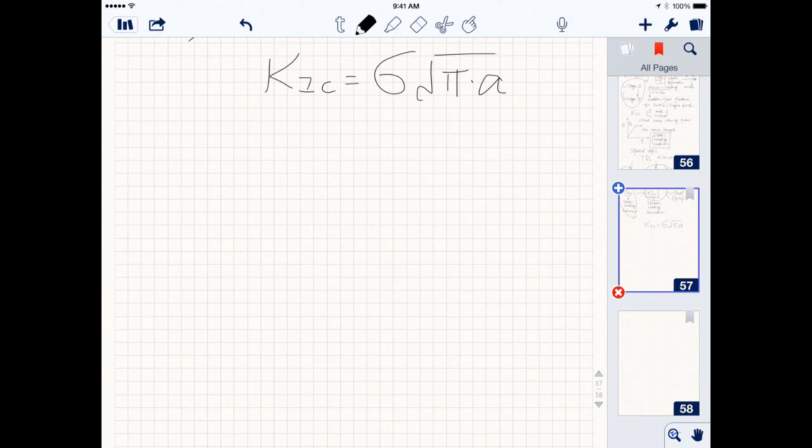Okay, so now a quick brief review of dynamic failure. What we ended up with last Thursday is we know tensile strength is the quantity we care about most when you have static loading, right? We say when the stress is limited to a certain value, and if the stress applied to the material is higher than the tensile strength, then failure is going to happen. That's what this thing here means, right? Now, for dynamic failure, we have another quantity we introduced called K1C, it's called the stress intensity factor. And here is the equation to quantify how you calculate K1C, alright?

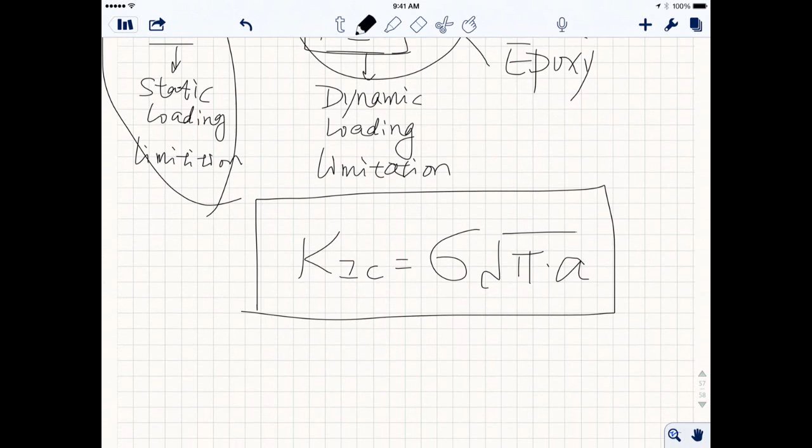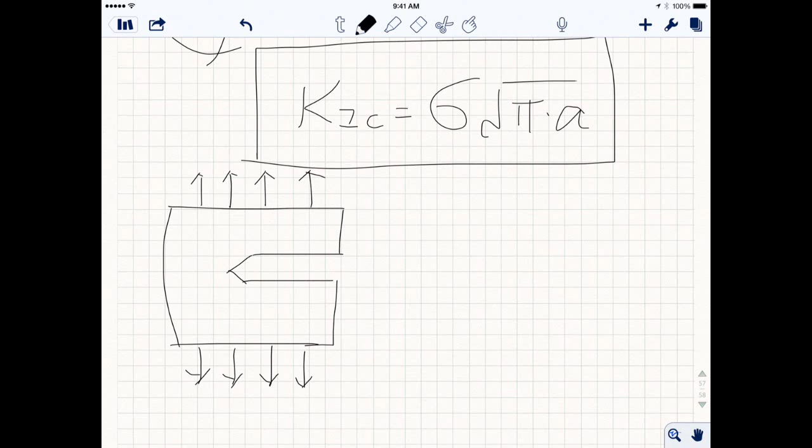Now, what K1C does is imagine if you have a material, something like that, then you have an artificially created crack on the surface or somewhere internal to the material. You are going to apply stress in a global fashion, apply stress here, here, here, here. Now if the length of this crack is 2a, length of crack equals to 2 times a, then your stress intensity factor, this K1C, basically tells you what the stress is going to be at the crack tip, right? Because we all know when you apply stress to a material that has a crack, the stress here is going to be very high because of stress concentration, right? Because all here, this is all cracked. Therefore, when you apply stress, the stress at the tip will be really high, right?

So we all had the experience of buying, for example, a bag of candy, right? Usually on a plastic bag, a bag of candy, you see something like those.

Candies. I don't know how to draw candies. Something like that, or chocolates, right? And then here you have the sealing or whatever. If you want to tear it open, if you want to open the candy, you always start with this notch, right? You try to tear it apart, right?

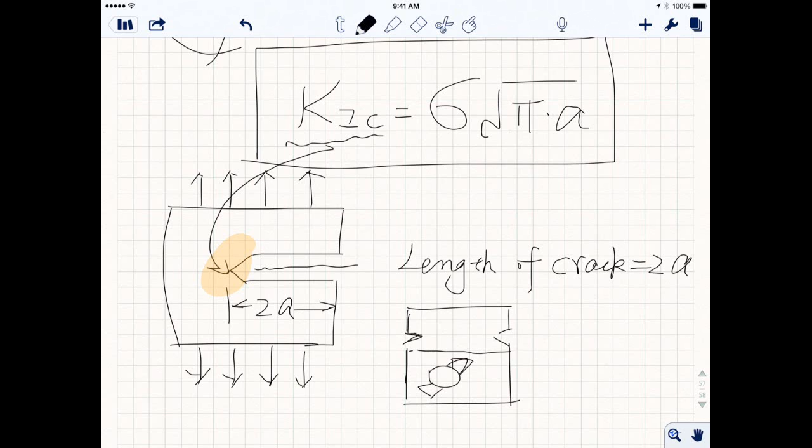So similar things here. When you have a pre-existing crack, the stress intensity factor is designed to take into consideration of the stress concentration, right? Now that tells you the stress at the tip equals to the global stress, which is stress applied globally, equal to F divided by A, times square root pi times A. A is half of the crack length, right?

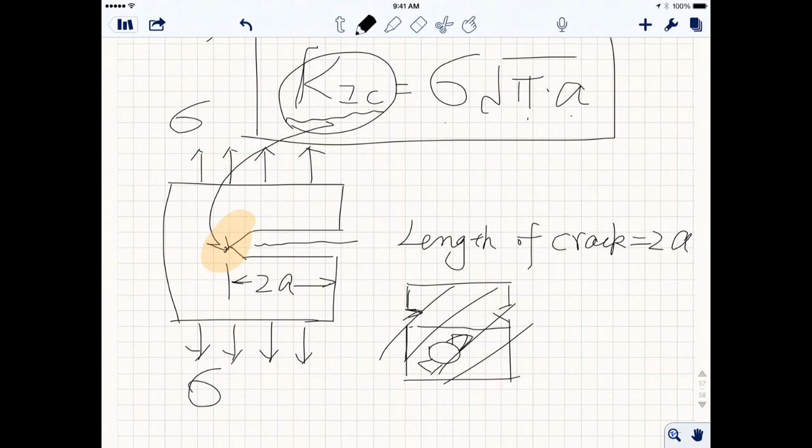Okay, now stress intensity factor K1C is a material property. You can find this K1C value on any of the engineering design handbook, all right? So once we know that, then we can do lots of analysis, which hopefully we have time to cover it. If not, that's fine too, because this is probably a graduate level class content.

Okay, so what we're going to do next is we know this dynamic failure, right? So we design a material system. How are you going to take into consideration of dynamic loadings, all right? There are lots of parameters out there you need to consider. So let's start with the concept endurance limit.

The concept of endurance limit means it is for prototype design. It is a quick estimation of dynamic strength. So basically the endurance limit is a quick estimation of dynamic strength, all right?

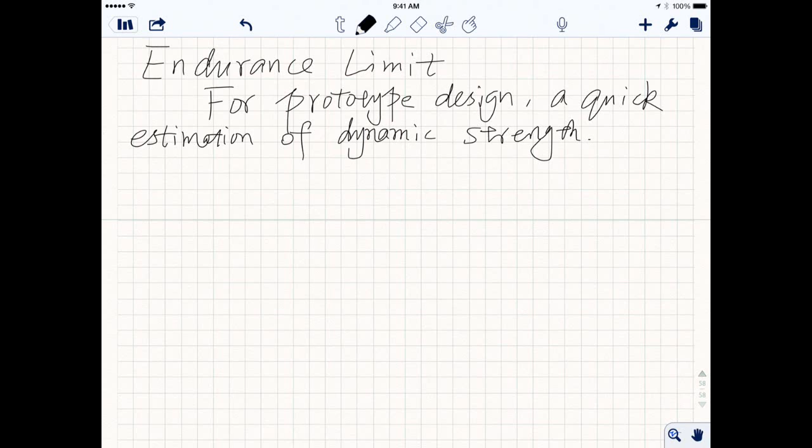Similar concept to static strength. Okay, so for most of the structural materials, either aluminum alloys or stainless steel or titanium alloys you guys like to use, most of the time this endurance limit, SE prime, is roughly equal to 0.4 or 0.6 times ultimate tensile strength, all right? So in other words, it's equal to about 40% to 60% of the tensile strength on a static loading condition, right? So this SE prime, it's called endurance limit.

And this SUT, we all know this is called ultimate tensile strength, right? This is a static loading condition point of view. So this is a number you guys can find from McMaster or from other websites, right? It tells you on a static loading condition, what's the maximum stress you can apply, right? That tells you when we have dynamic loading for most of the engineering materials, the strength, this is dynamic strength. Dynamic strength is equal to roughly 40% or 60% of the static strength, right?

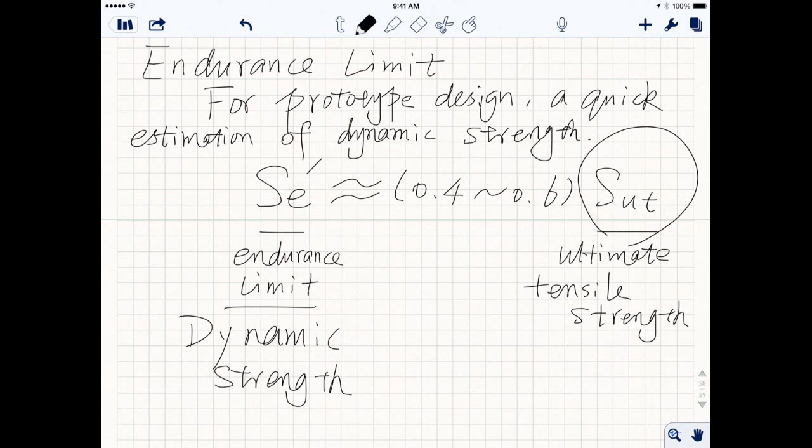Okay, now, one thing we always know is most of the time, shaft is made out of steel, right? Because steel has high tensile strength, and also steel has, relatively speaking, good hardness, right? Better than all the alloys out there. So for steel, the endurance limit, SE prime, it's equal to 50% of ultimate tensile strength, or 100 KSI, 700 megapascal.

This is when you have SUT smaller than 200 KSI or 1400 megapascal, depends on whether you use English unit or metric. All right, so the condition over here is if you have static tensile strength less than 200 KSI, or in other words 1400 megapascal, then you go dynamic limit, which is we call endurance limit, equal to 50% of the static strength, all right? Or otherwise, if it's higher than that, then we just take 100 or 700 megapascal, depends on what unit you're using, all right? Okay, so this gives us a quick estimation of your dynamic loading strength, or in other words, dynamic loading limitation, right?

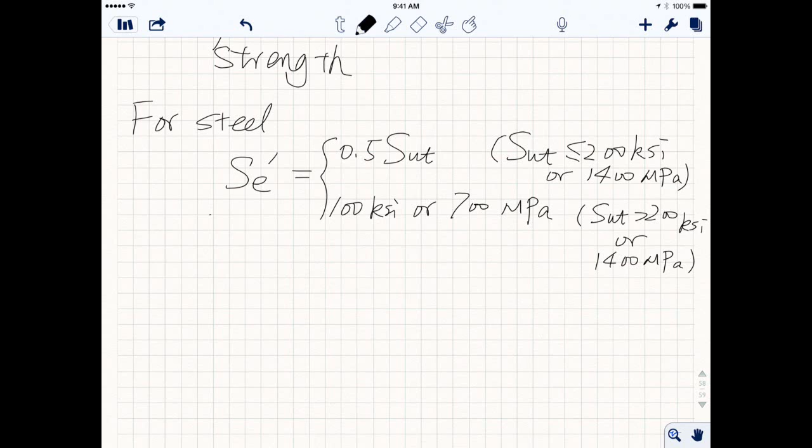Okay, so this is a new concept, SE, and we will be using this to guide our designs of shaft or other component we're going to do in the rest of the class, all right? Okay, so see here.

So we're doing dynamic loadings. Dynamic loading, in other words, it's going to cause fatigue. In other words, fatigue is dynamic failure. In another form, you can say fatigue is an ultimate failure when your dynamic loading reaches the limit. The material, especially metal, fatigue will happen, right? So fatigue failure analysis is important. It's very similar to what we did before when we had a maximum shear stress or distortional energy method, right? Okay, so here we have some methods out there we can use.

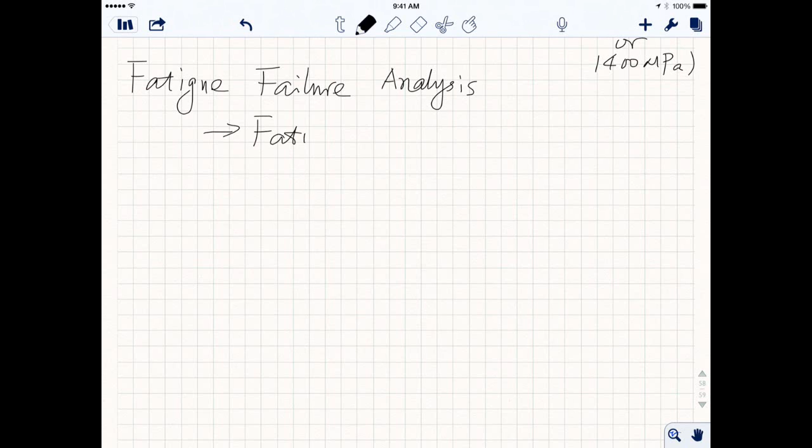The first one is fatigue life method. First one is stress life. That assumes it is a stress caused the failure in dynamic motion fashion, right? So we need to look into the stress.

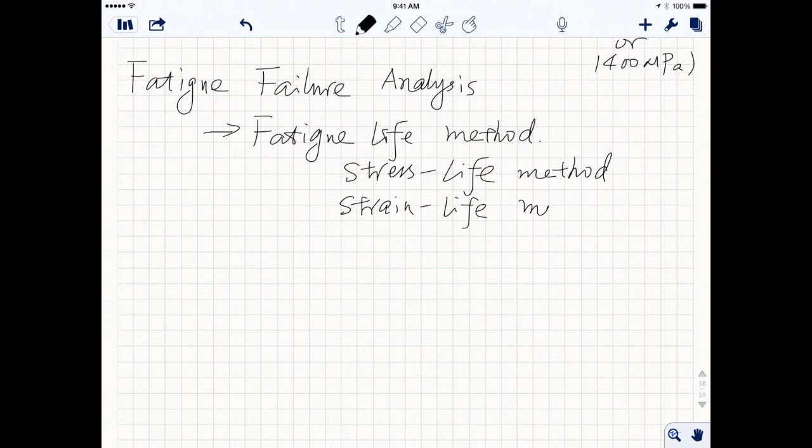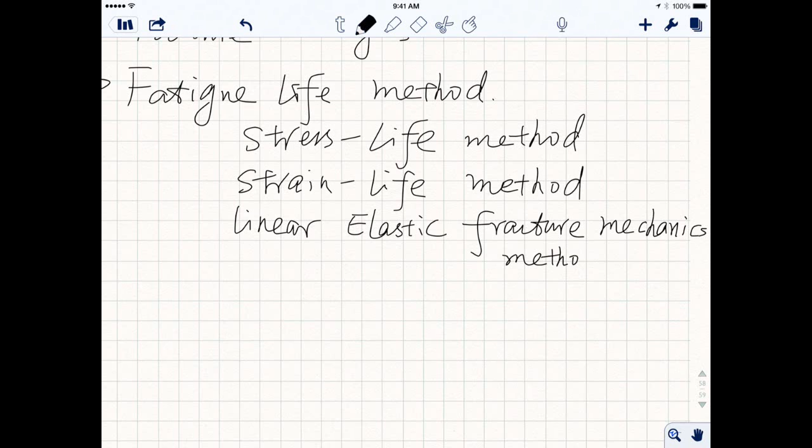Second one is strain life method. So this method assumes it is a strain that caused the ultimate dynamic failure, right? So we need to focus on strain. And the last one called linear elastic fracture mechanics method. All right. Or we also have another method out there which is called fatigue strength.

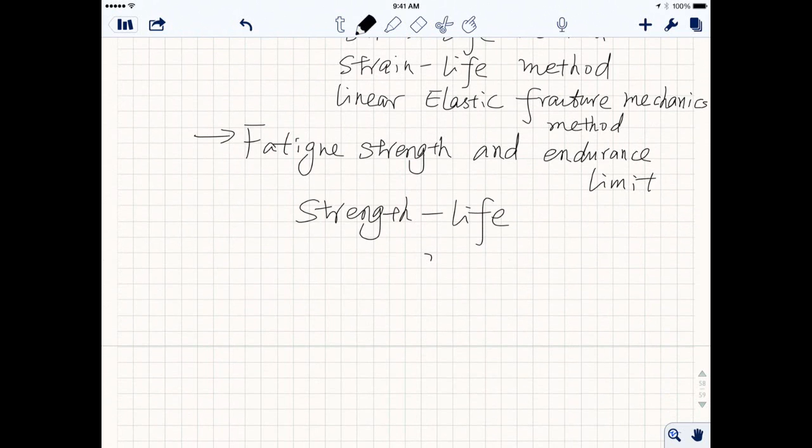And endurance limit. All right, so the most popular one, which we'll be spending quite a lot of time on, is called a strength and life diagram, which is the S-N diagram.

Well, there's a new term we've been talking about: life, right? Strength we'll know, strain we'll know, stress we'll know. But what is life? Life means how many times of dynamic loading it can carry before it fails. So that's why it's N. Take an example of bending a copper wire. Typically you have to bend it a couple times before you break it, maybe 10 or 12 times. That number is life - it tells you how many times of dynamic loading it can carry before failure happens.

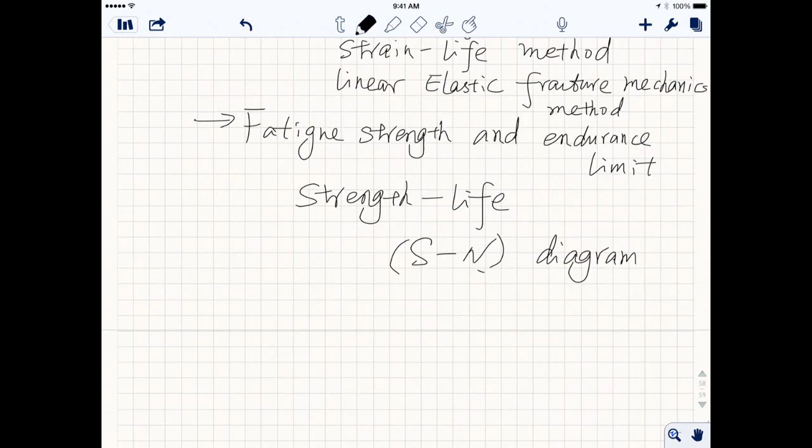Okay, so that is what we care the most about, because for dynamic loading, we know the endurance limit can be estimated by this. But how many times of loading it can carry, that matters, because that gives us an estimation of how many hours of life it has, or how many cycles it can carry before failure happens.

Let's see next. So endurance limit is a very powerful estimation of dynamic failure. But in reality, there are lots of influence factors that will also affect your endurance limit. So let's take a look at what kind of modification factors are out there that we need to consider when we have an endurance limit.

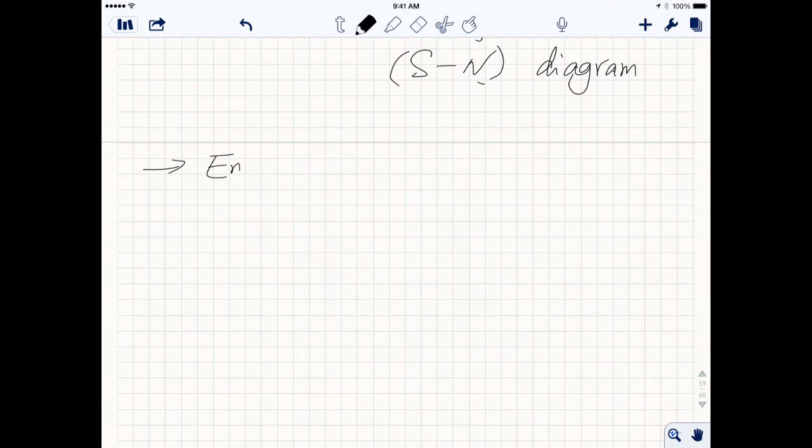So, endurance limit modification factor. All right, so first one: surface conditions.

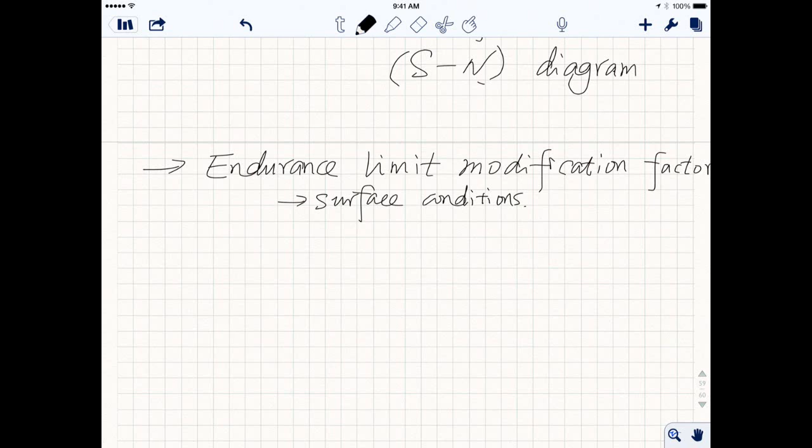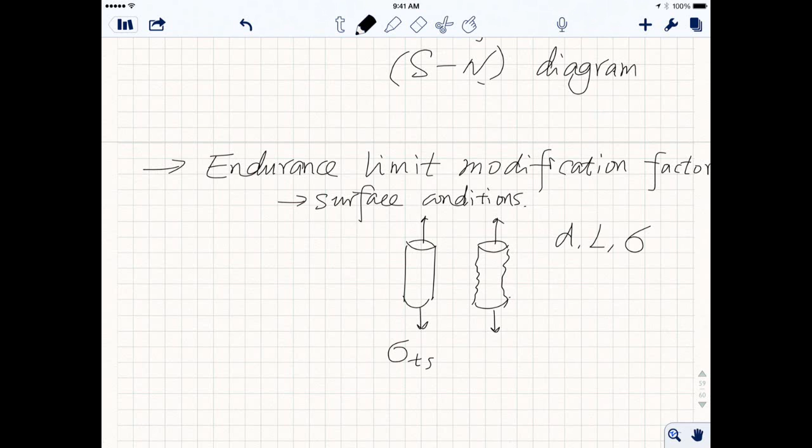Okay, so let me give you a quick example. I have two rods. One of them has been polished really nice, very smooth on the surface. The other one is rough on the surface, right out of the forging process or whatever. They have the same diameter, the same length, and the stress applied is of the same magnitude. So if I say this one has a tensile strength of sigma TS prime, and this one has a tensile strength of sigma TS double prime, take a guess - which one will be higher?

Prime or double prime? How many of you say prime will be higher? How many of you say double prime will be higher? Great.

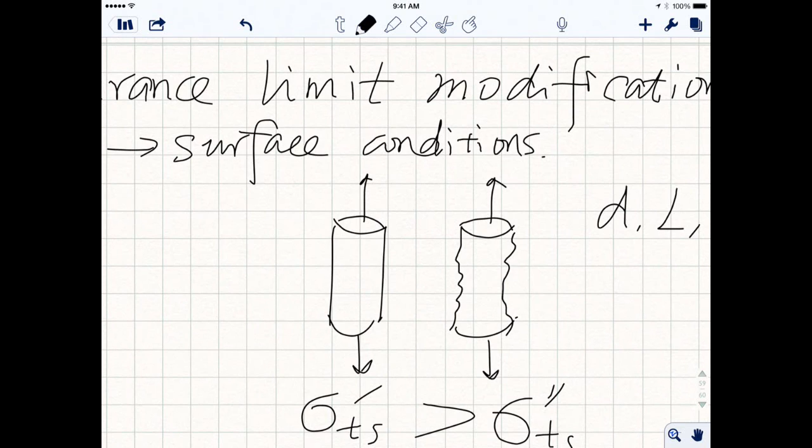Yep, all right, you guys are smart - I know that, right? Of course it'll be the smooth one that's higher. Because if you look very closely at those rough surfaces, you are going to find a lot of small surface cracks, which will induce a lot of surface stress concentration.

See here, this is an exaggeration of a realistic case - I have a crack on the surface. Usually, whenever you have a mechanical system, you don't have a crack, right? But crack, in other words, if you have a rough surface, if you zoom in at this location, you're going to see these kinds of things. We know the stress at the crack tip is higher. So in other words, if you have a rough surface, you have lots of high local stresses, which of course is going to give you less strength.

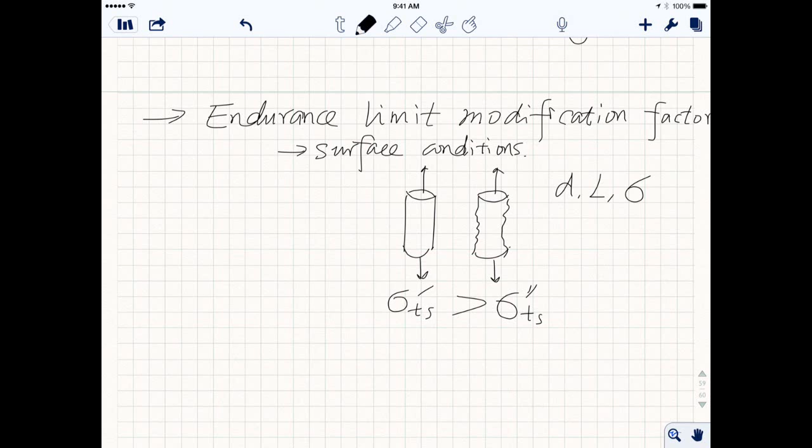Make sense? That's why whenever you have a mechanical system, you try to do a very good job polishing it, making sure it's smooth, with good surface roughness - the roughness number is low, in other words. So surface condition matters for shafts or for any component under dynamic loading. Especially because if you have local stress concentration under dynamic loading, it's going to exaggerate it, since dynamic loading has less strength compared to static. So surface condition matters.

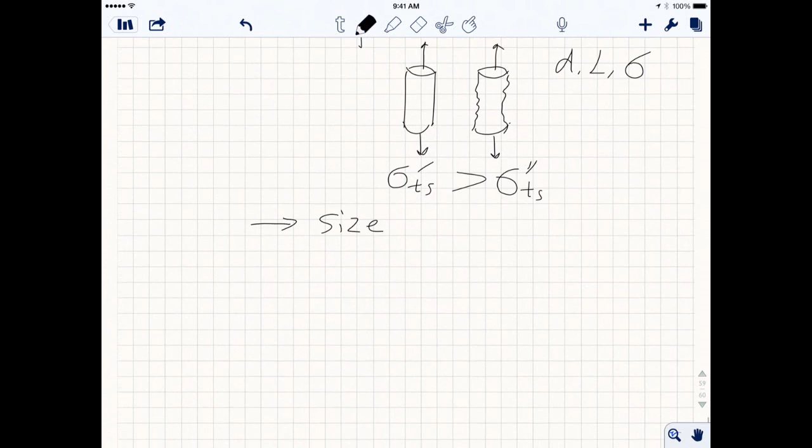Second, size, in terms of geometry. Now, a couple of extreme cases.

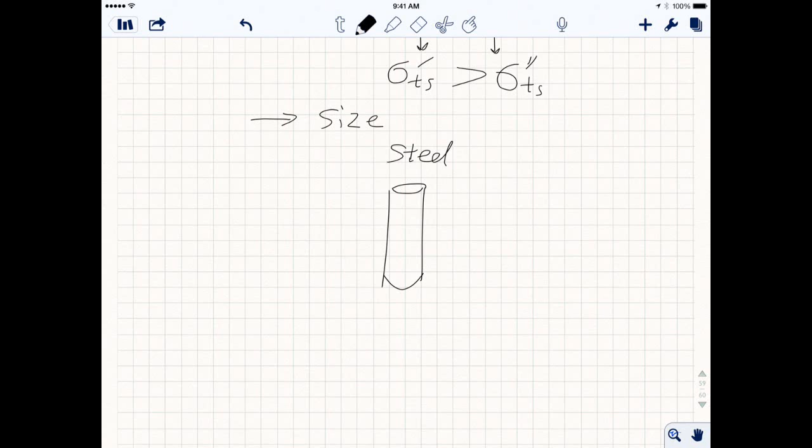If I have a steel rod - what's wrong, Andres? Is that sigma strength or stress? Strength? Oh yeah, okay, tensile strength - TS, tensile strength.

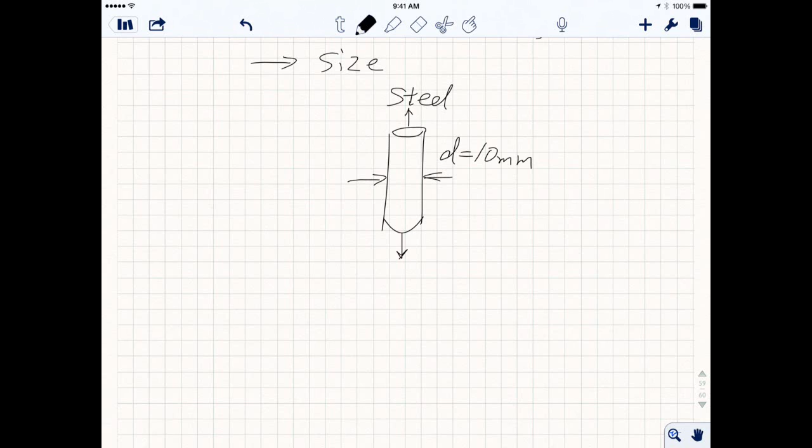Okay, so if I have a steel rod with a diameter equal to, for example, a very common 10 millimeters, and I apply loading on it, apply stress - or I have a very, very small steel wire, let's have some exaggeration, this diameter equals 10 nanometers - now again I am going to consider the tensile strength of these two materials. They have the same surface finish, same material, the only difference is diameter. So take a guess: which one is higher, prime or double prime?

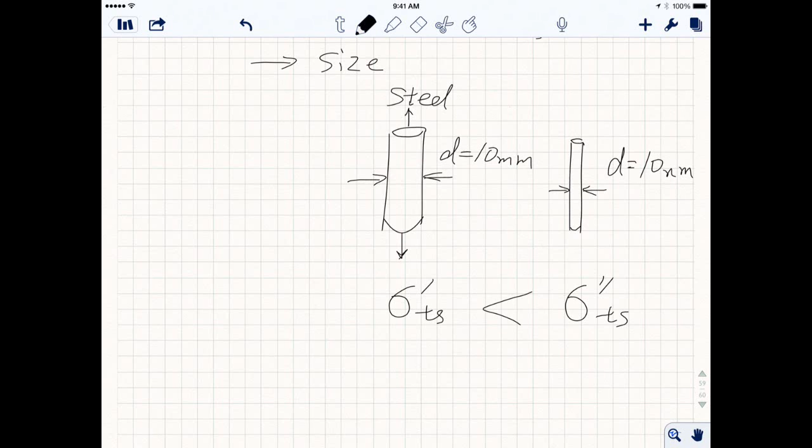How many of you say prime? How many of you say double prime? All right, those people who say double prime should get some extra credit, huh? It's this. Yes? Okay, all right, why is that?

Okay, first of all, let's say, you guys heard of this term? Nanotechnology? Sure, you guys heard of something called nanotechnology? Right? So why is nanotechnology so popular, or draws so much attention?

Small, because they're small? So we like small things? I don't think it's true for everyone. Some people like big things. Texas, right? We all like big things. Everything's big in Texas.

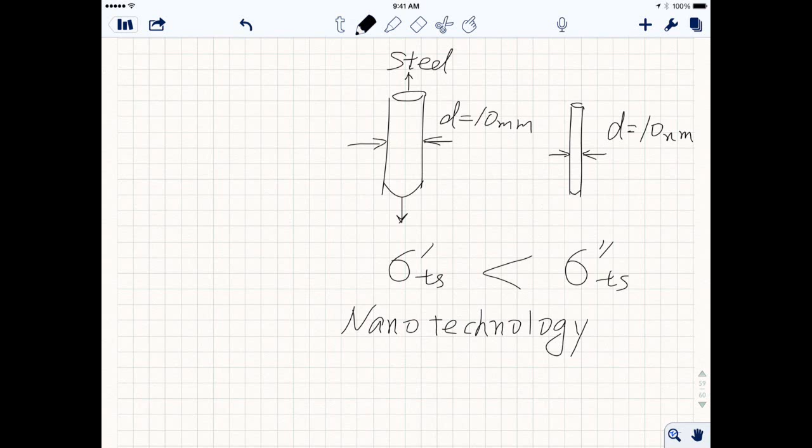Nanotechnology is important because when the material size goes down to less than 100 nanometers, the mechanical, electrical, or magnetic property gets significantly increased. For example, carbon. You guys have heard of carbon nanotube, right? A lot of you heard of it. Why is carbon nanotube so popular? It's just carbon, but its Young's modulus is about 3 times higher than steel. It is just carbon, but it's 3 times stronger than steel.

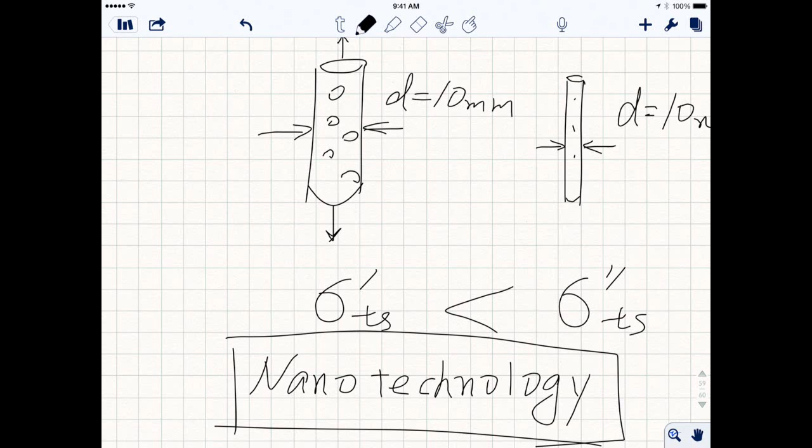That's incredible, right? A quick explanation of why going down to nano scale is better: when you have a big size material, you have a higher chance of internal defects. When you have nanoscale material, because it's so small and the crystals are so well aligned, you have fewer internal defects. Remember last Thursday I said most dynamic or even static failure happens between grain boundary conditions, right? Because metals aren't uniformly arranged atoms, they have grains, and failure always happens at the grain boundaries. So larger material has more chance of defects at grain boundary conditions. But in nano scale, since it's so small, you don't have those things, so you have less chance of defects and fewer grain boundaries. Of course, it's going to be better. Make sense? So that's why nanotechnology is so important and draws so much attention.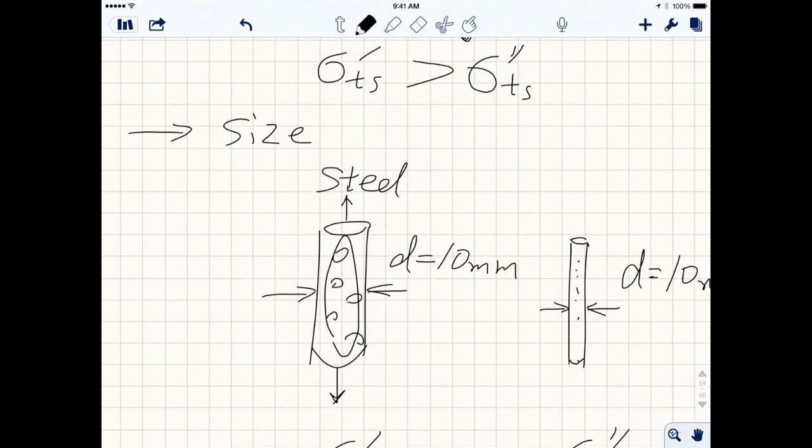So size, we know it'll influence things, it's a modification factor, right? So probably now you can guess: if the size is big, your endurance limit will be lower. If the diameter or size is small, your endurance limit can be a little higher. All right, so this is just a qualitative analysis, we'll go to quantitative analysis later on.

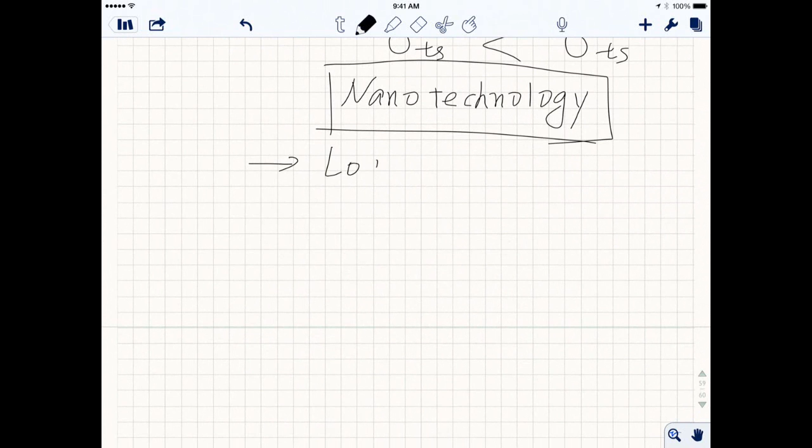The next one is loading. It's so easy to understand, right? If your loading magnitude is high, of course your endurance limit will be lower. So that's nothing I need to say more about.

Temperature. Of course temperature is important, because most of the structural materials we use are metals. So for metal, here's something interesting: your tensile strength is a function of temperature. When the temperature is higher, your tensile strength goes lower. That's easy to understand, right?

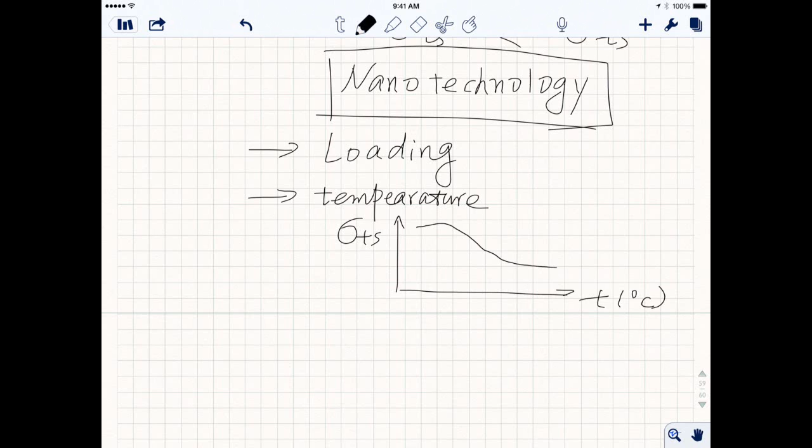Have you guys seen how they make things like that? Last night I watched a video from a program called How It's Made. There's one video about how they make wrenches. First they cut a steel rod and then heat it up to a really high temperature, about 1800 Fahrenheit, until it becomes red hot, and then they can do the forging.

Why do they have to heat it up? Because your strength, once it's at a high temperature, is lower. At room temperature, it's still so hard you cannot deform it very easily. But once it's at high temperature, using the same amount of force or stress, you can deform it and cause plastic deformation. You need to understand that, right?

Another example, maybe inappropriate, I've probably told you guys already: everybody chews gum sometimes, right? Initially when you take it out of the package it's very hard. When you chew it for a long time, it becomes soft. Then if you go to a drinking fountain and drink some really cold water, what happens? It becomes harder again, right? So at lower temperature, your strength or modulus is higher; at higher temperature, it's lower. Easy, right? So therefore, when you consider endurance limit, temperature matters. At higher temperature, it's going to be lower for sure.

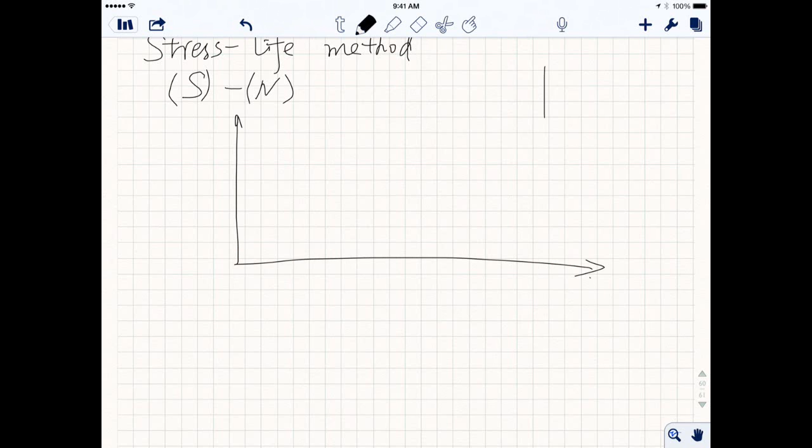Now the stress can go like this. Stress as function of time can be positive, negative. So this is called a one cycle. From here to here, right? When you finish one period, that's called one cycle.

This is number of stress cycles, which we use N. And over here, I have fatigue strength.

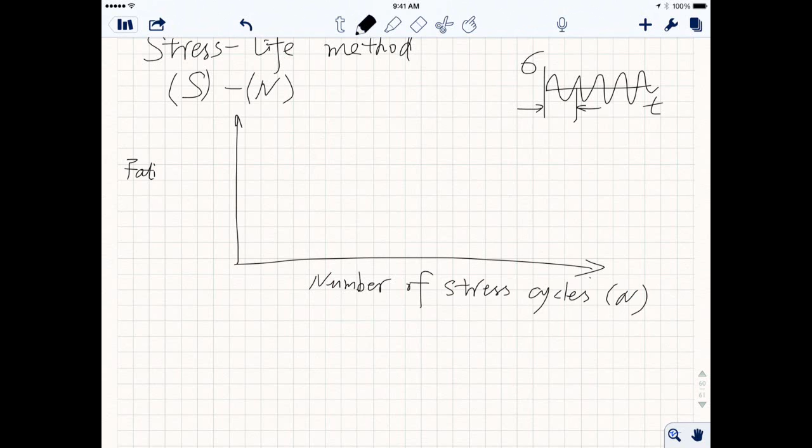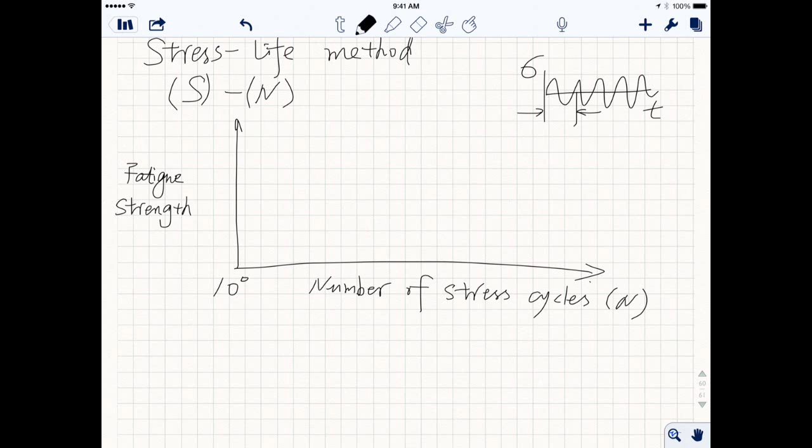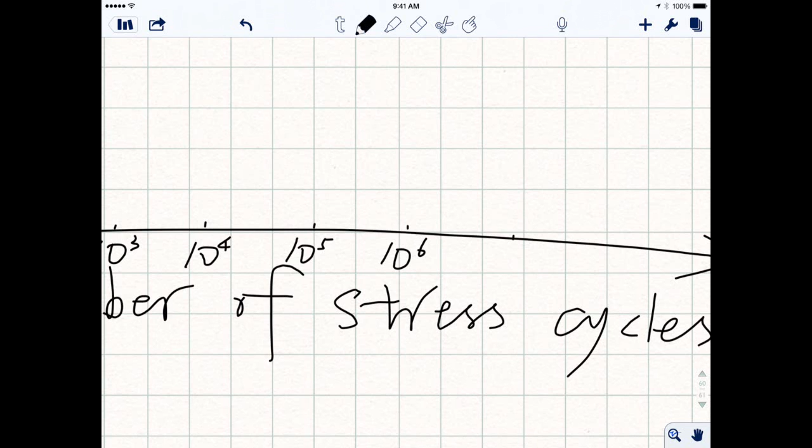Fatigue strength. Okay, so of course the number of cycles is going to be a high number. Let's say we start with 1, 10 to the 0, 10 to the power of 0, and we have 10 to the 1, 10 to the 2, 3, 4, 5, 6, and 7, and 8. Let's just stop here, right?

All right, so number of cycles start from 1 all the way to 10 to the 8, right? Okay, so y-axis is my fatigue strength. Fatigue strength means under this number of cycles, what's the strength of the load you can apply, right? Okay, so it goes like this.

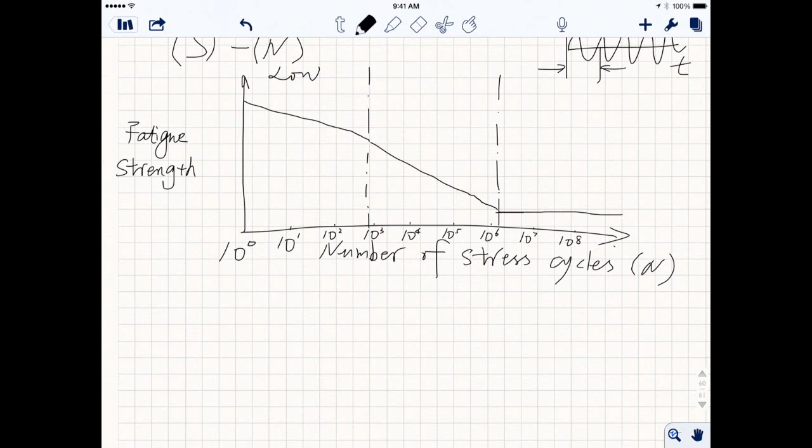Alright, so in mechanical design, if it's less than 1,000 times of cycle, we call it low cycle. And over here, we call it high cycle. Past 10 to the 6, we call it infinity. Right? So this is how we define number of cycles. Okay.

Now, who can tell me what is this number here? Right here. What is this number should equal to? And compared to static, yeah, that is just equal to static tensile strength, right? It's just one cycle, which is exactly the tensile strength, SUT.

All right. And another interesting point is you see after past 10 to the 6, it's going to reach a plateau, right? It's going to be steady, right? It does not significantly decrease anymore. So here,

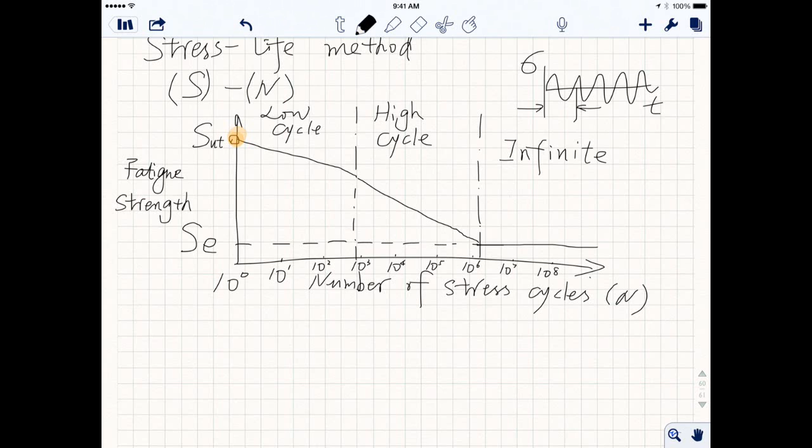this number we give a name. The name is called endurance limit. That's something we already learned, right? Makes sense, right? What does endurance limit mean? If your stress is lower than that limitation, no failure is going to happen. Makes sense, right? Okay. So here, SE, which is this lowest number, which becomes stable after 10 to the 6 number of cycles, 1 million cycles. Endurance limit. Okay. All right.

And just a quick reminder, most of the time it's for ferrous metal and alloys. So any metal that contains iron, all right? So it has this fatigue endurance limit. It's very obvious, okay?

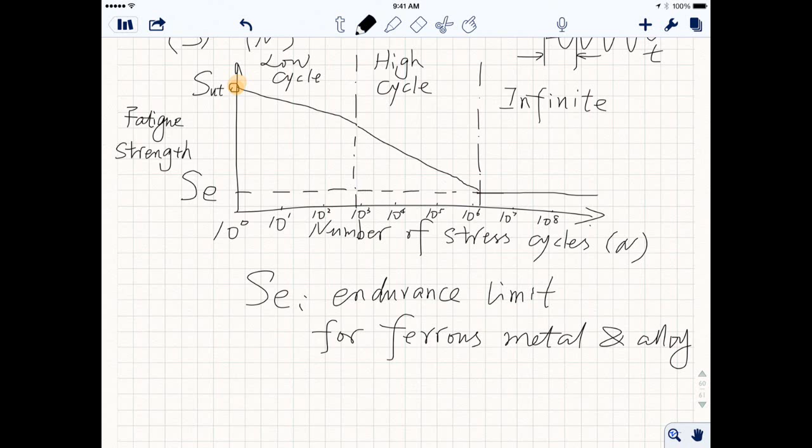All right. So I guess I can stop there. I don't have to say anything about these. Just skip that. Okay. All right. Next important thing is endurance limit.

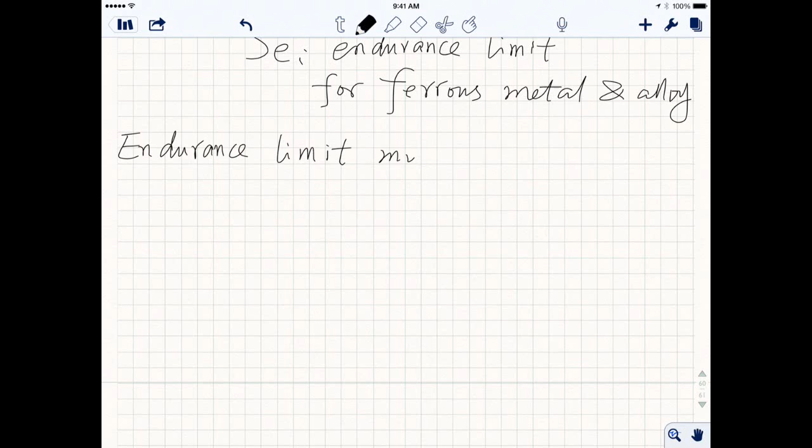Modification factors.

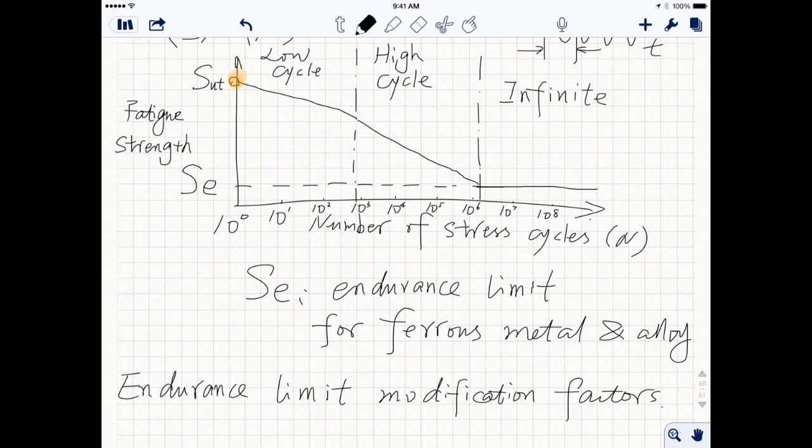We know endurance limit is important by looking at this plot. It tells you what dynamic stress you can apply before failure. If you want a shaft, like in your car, to have infinitely long life, you don't want your axle to break, so you have to consider the endurance limit. But as I mentioned, lots of parameters influence it: load, temperature, reliability, size, or surface conditions. Next, we're going to see how we can quantify those influence parameters.

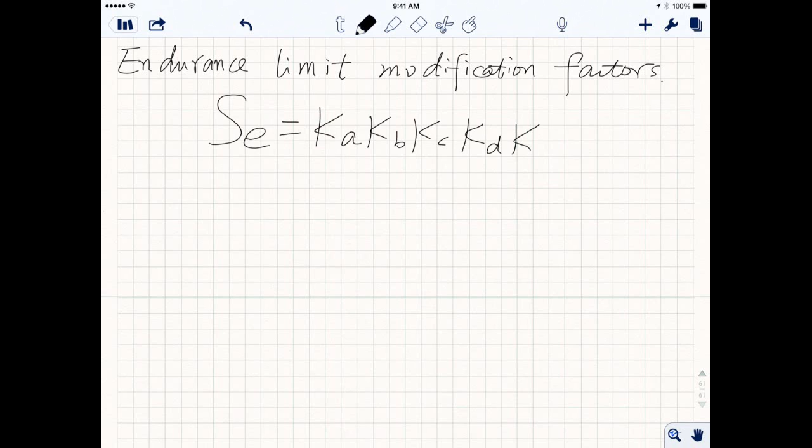Okay, so the fundamental equation is very easy. It doesn't have that many parameters. There are only 6 parameters you need to consider.

No worry about those things, we'll go through them one by one. This is how we defined it at the beginning of class: this is the endurance limit, SE prime. Just K, Ka, Kb, all the way to Kf, times SE prime. We can have a quick estimation of SE prime using this equation: SE prime equals half of SUT, or equals 100 or 700, depending on your static tensile strength. So SE prime you can quickly estimate. Then, by considering all these modification factors, you can get a modified, or more realistic, endurance limit.

Make sense? All right, so next we're going to look into these 6 parameters one by one.

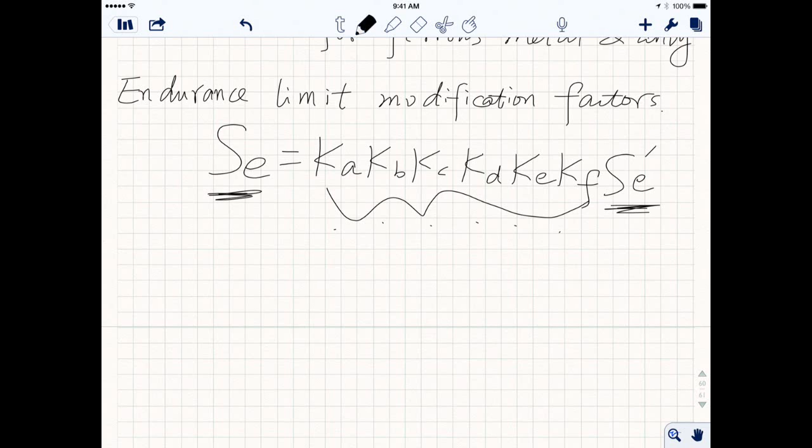Okay, the first one is Ka, it's called the surface condition modification factor. Kb is the size modification factor.

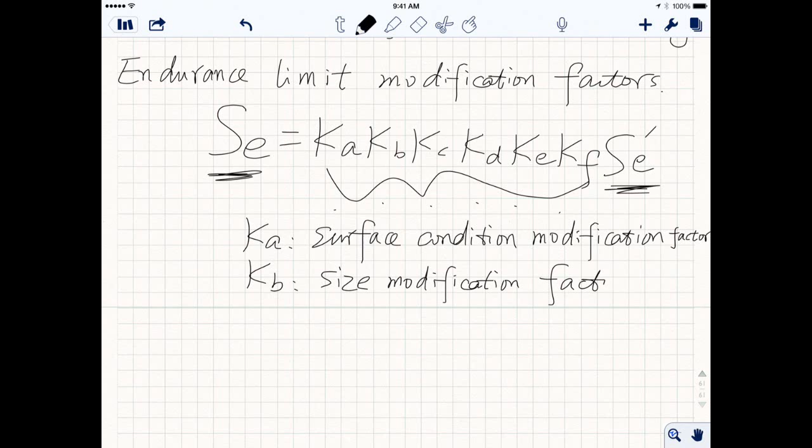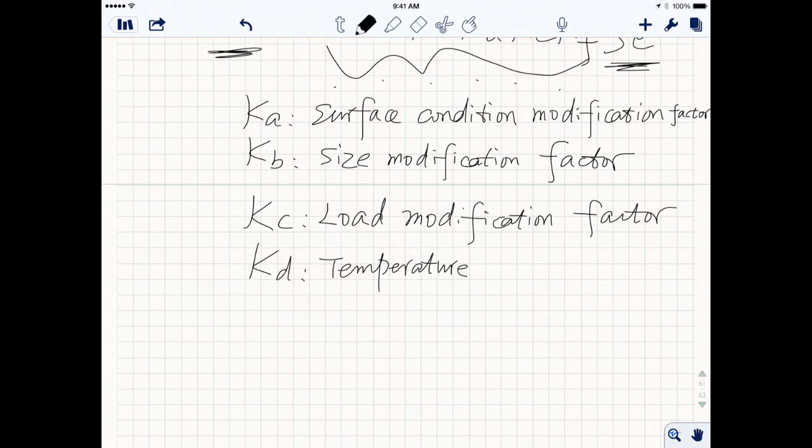This Kc is the load modification factor. And there are 3 more: Kd is temperature, Ke is reliability, and the last one is miscellaneous effects.

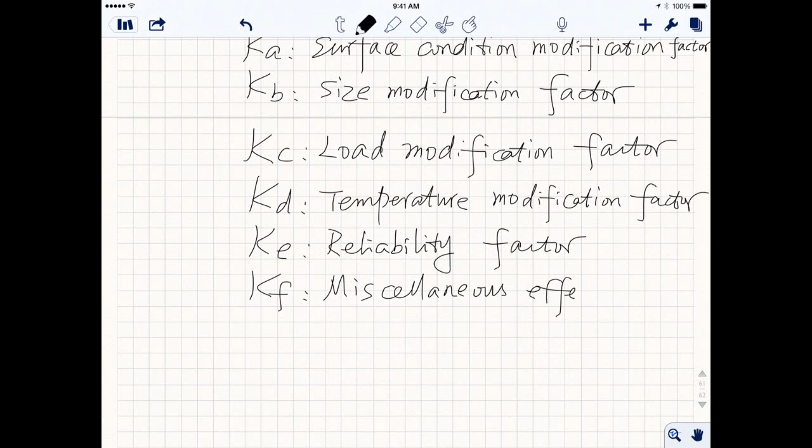And of course, SE prime is the nominal endurance limit, or in other words you can call it the theoretical endurance limit. The last one, SE, is the modified endurance limit.

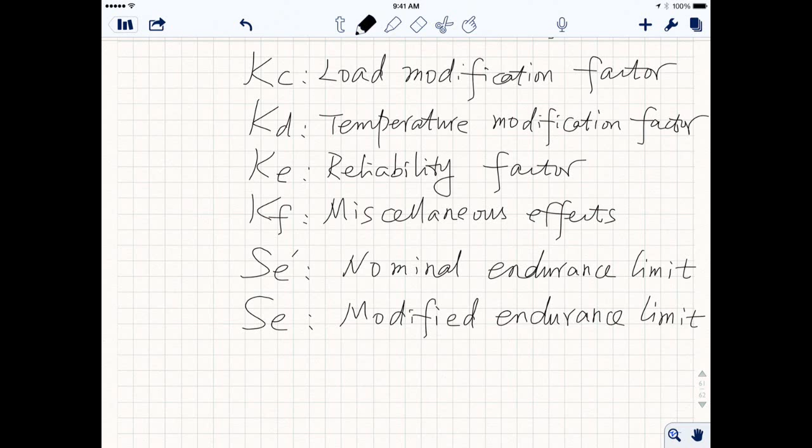So, 6 parameters. The whole purpose of using these 6 parameters is to see, from a realistic point of view, if you have different size, different temperature, or different loading conditions, or different reliability issues to consider, how the endurance limit is going to change. Okay, so in the next 10 minutes or so, hopefully we can cover 2 of the parameters. Let's look into Ka first.

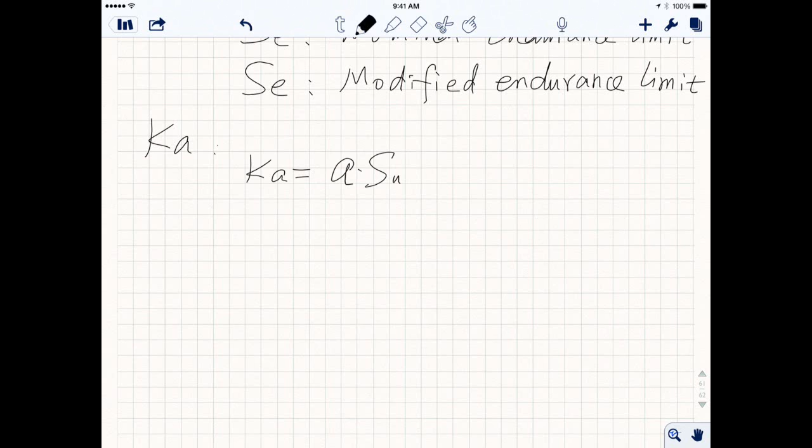For Ka, the equation you can use is A times SUT to the power of B, where SUT is tensile strength, and A and B are coefficients. Now, Ka is surface condition, so for different surface finishes, you're going to have different A and B values, as you'd imagine.

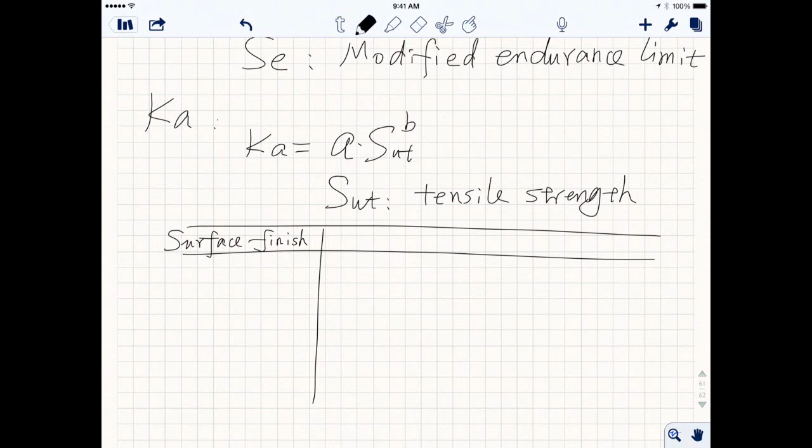So, for surface finish, for most of the time, for rotational parts, there are 4 different kinds of surface finish: first, you can have it ground, or you can have it machined using a lathe, or hot rolled, or lastly, as forged.

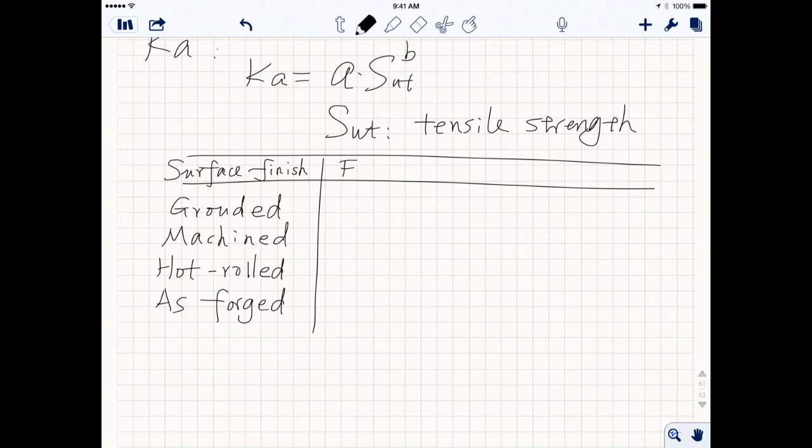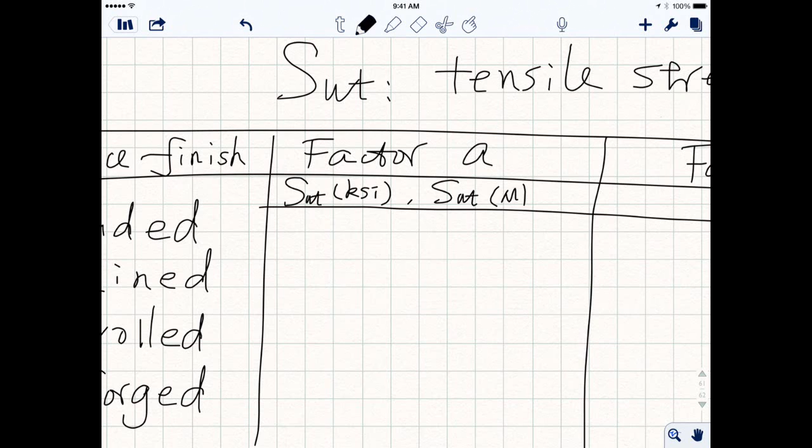So for the first one, ground, you have factor A and factor B. Here you have SUT in English units, KSI, or SUT given in metric - these produce different values depending on the unit system.

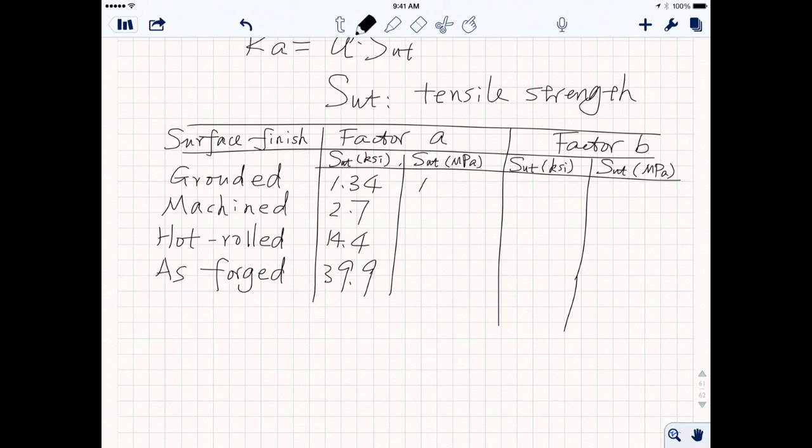Now, as you can see, those numbers are their own - it's not so weird because everything is based on experiment, empirical data from a bunch of testing. That's why these 2 parameters come into play. In other words, all the testing data are curve-fitted, and the parameters are generated by a computer.

Alright, so for parameter B, actually they're the same, no matter which unit you use. Just to be consistent, I'm going to write it one more time.

This table basically gives you the parameters A and B, based on the surface finish, based on the final machining method you use, and then you can just pick the parameters, right?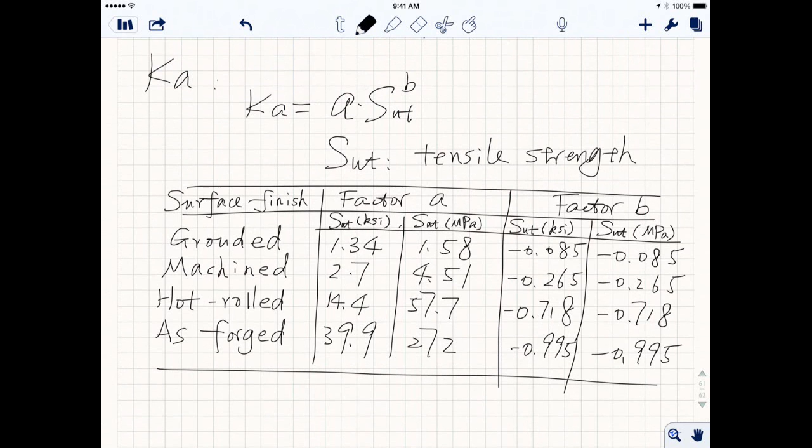All right, so let's take a quick look at these Ka. Huh? Why are these numbers the same? Just because the power of B, they are the same. It's because this is based on the experiment. So when they did the curve fitting, no matter whether you use English unit or metric, they are the same to the power, right? But the coefficient multiplying in front are different.

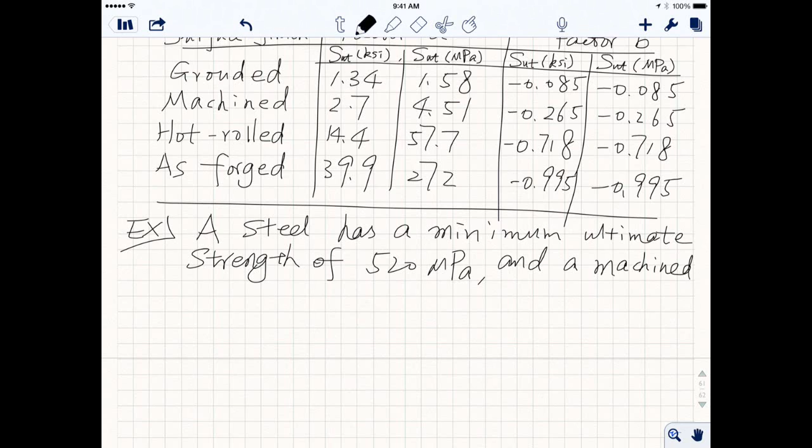Okay, all right, so let's look at a quick example. A steel has a minimum ultimate strength of 520 megapascal, and a machined surface. Estimate the Ka.

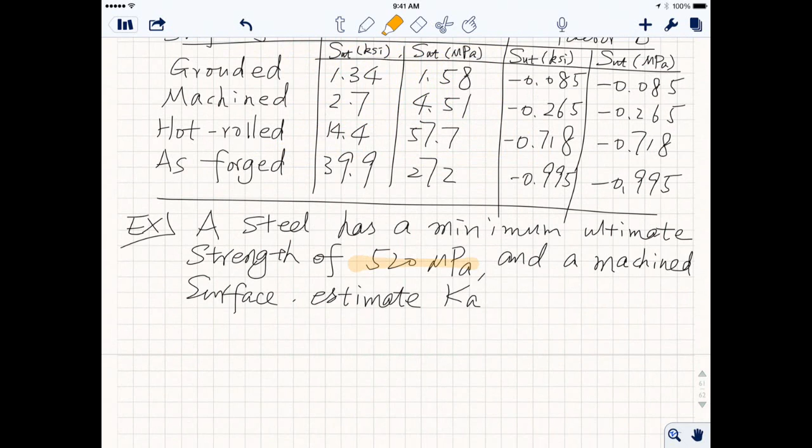Alright, so now key conditions here. First of all, it has minimum strength of 520, that's SUT 520, right? And it has a machined surface, so probably I need to choose this. Then it's given out in metric, so this number is what I need to use, along with this. So just pick these two numbers, plug into that equation, should give you the Ka, right?

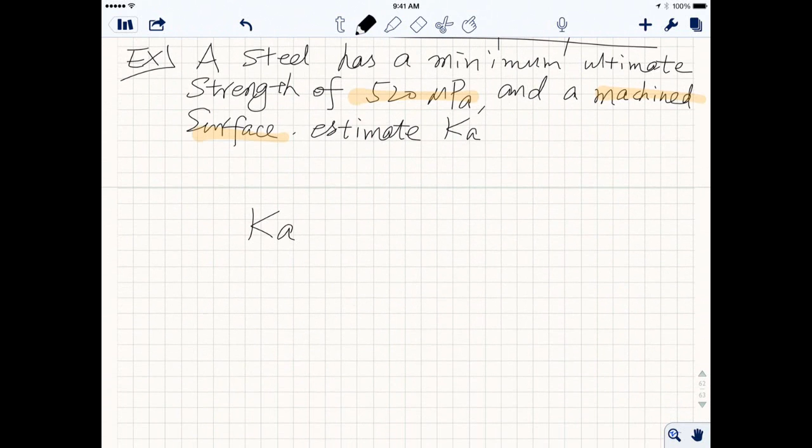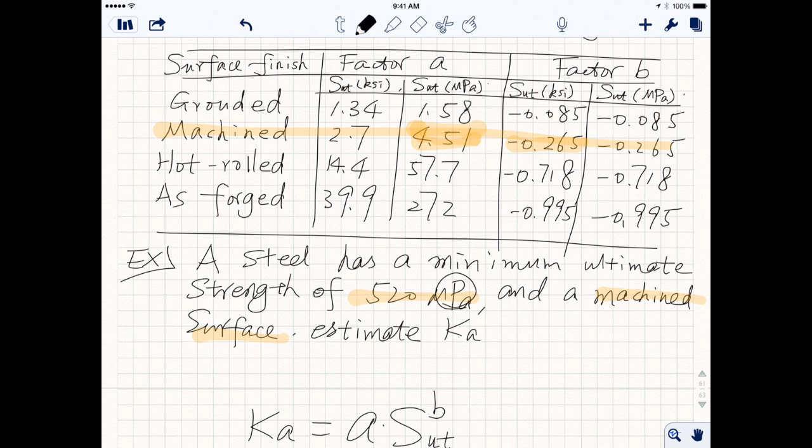So let's take a look at what Ka equals in this case. Ka equals A times SUT to the power of B. From the table, your A is 4.51. SUT is 520. In the future, if this unit is not megapascal, you have to convert into megapascal. Alright, so see here, everything is given out in megapascal. 520 megapascal, and B is negative 0.265. Multiply that together, equal to 0.86.

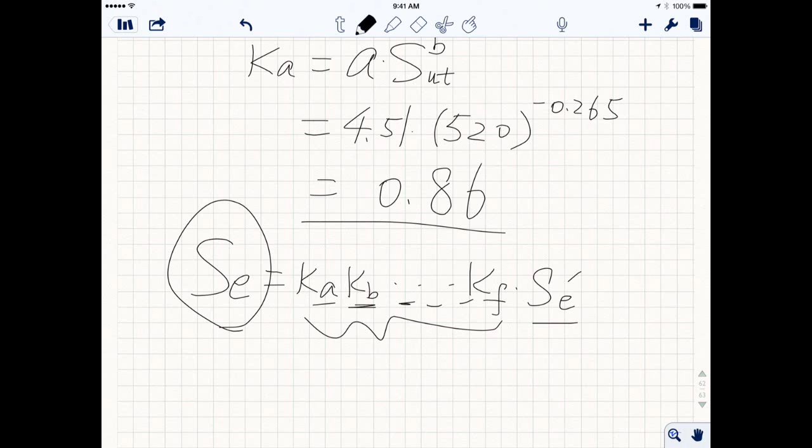So most of the time when you calculate out your Ka, it'll be less than 1. Why is that? SE equals all your Ka, Kb, all the way to Kf, times SE prime. This is my theoretical endurance limit, but depending on your conditions, modification factors, it's going to give you a more realistic value, right? At a high temperature, of course it's going to be lower. At a big diameter, of course it's going to be lower. So all these parameters, most of the time, they are smaller than 1, right? In some equations it'll be higher than 1, which I'll tell you later on. But most of the time, 90% of the time, it's less than 1, all right? If your calculated number is like 1.25, probably it's not right.

Size factor. All right, size factor. It's considered as two different components here.

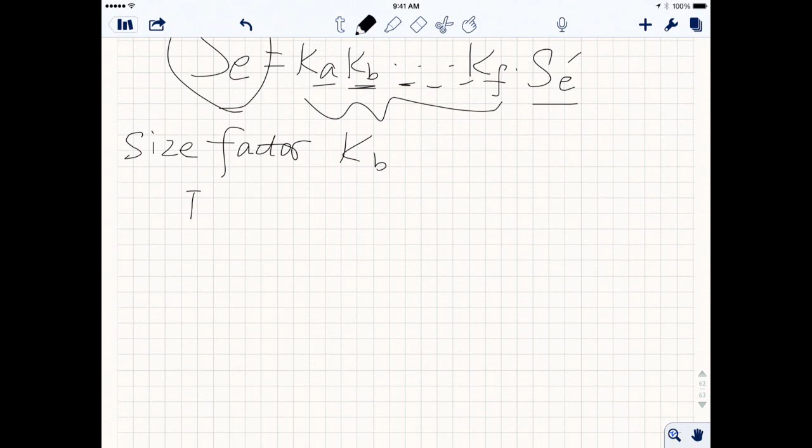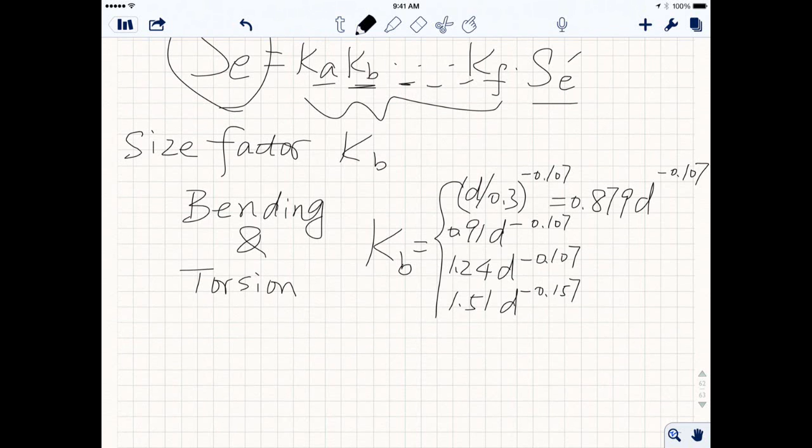All right, so of course you have 4 different conditions. That is all decided by the diameter of the shaft or the beam. 51 to 254 millimeters is for this case, and over here is 2.79 to 51 millimeters, or if you use inch, here is 2 inch to 10 inch, and the first one is 0.11 to 2 inch. Right, sorry, I have limited space, use the red over here so therefore you don't get confused. Alright, so the first one is 0.11 to 2 inches, right? The second one is 2 inches to 10, and the third and fourth, they're just metric, they're the same, right, if you multiply by 25.4.

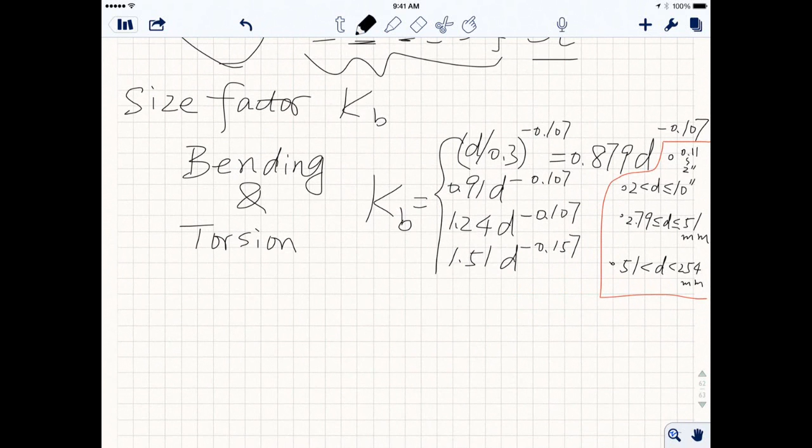Okay, so depending on your shaft diameter, you have different modification factors for size when the beam is on bending and torsion, right? Now, if you have axial loading, in other words tension or compression, right, this Kb is just equal to 1 at this condition, right? Now, in order to consider that, Kc will kick in and take care of the axial loading conditions, right?

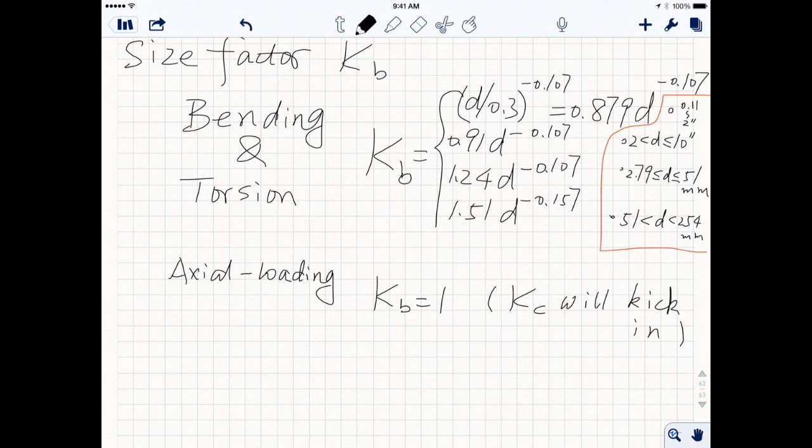Okay, so let's see here. Now, sometimes you might ask me, what if my beam is not a circular shape? What if it is rectangular? For most of the simple support beam problems we have been doing, right, they're all rectangular. So if you have rectangular, how is that going to be? So we have something called equivalent diameter. All right, after this concept, I'm done, right? One last thing.

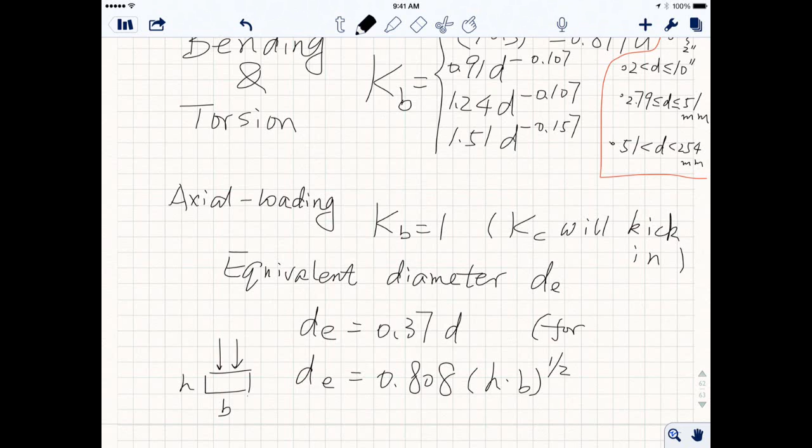So DE, equal to 0.37 times D, or equal to 0.808 times H times B square root. Remember, most of the time, if you have rectangular, base times height, that is your condition here. If your load is applied like that, base times height, B is base, H is height, right? Now, this is for hollow rod.